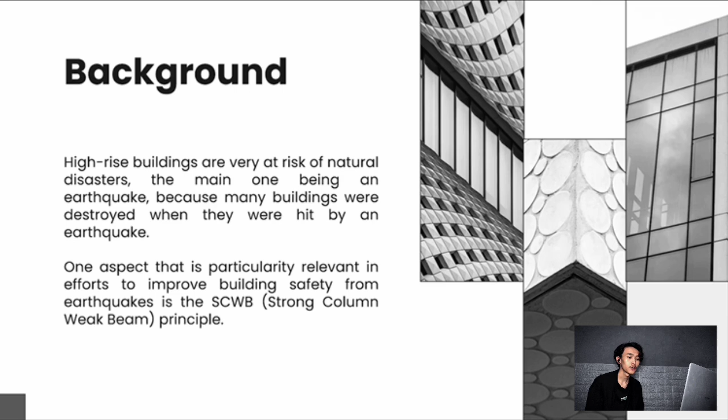Chapter 1, introduction. The first one is the background. High-rise buildings are very at risk of natural disasters, one being an earthquake, because many buildings were destroyed when they were hit by an earthquake. One aspect that is particularly relevant in efforts to improve building safety from earthquakes is the SCWB, or strong column weak beam principle.

And the next one is problem formulation. How to analyze SCWB, or strong column weak beam, on the safety and reliability of the structure of the Regional VII Branch Office Building, especially in dealing with earthquake loads and other loads. Next, the purpose of research: to analyze SCWB strong column weak beam on the security and reliability of the structure of the VII Regional Branch Office Building, especially in dealing with earthquake loads and other loads.

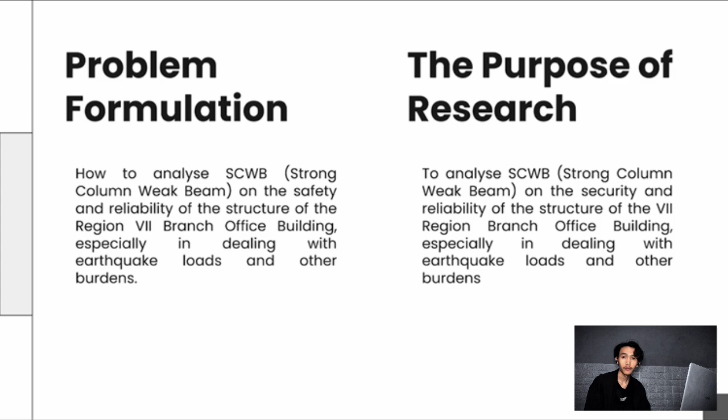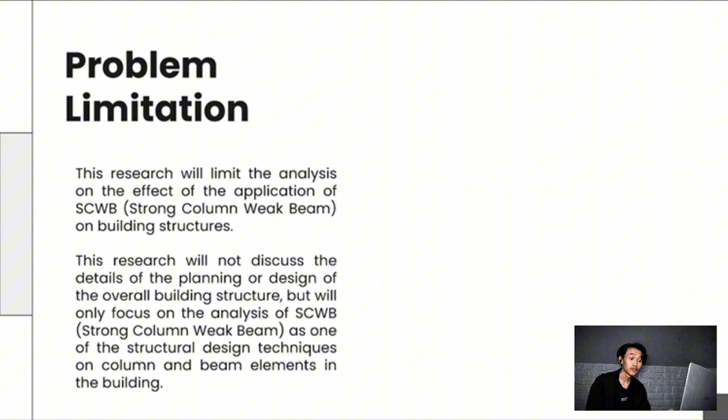Then, problem limitations. This research will limit the analysis to the effects of the application of SCWB on building structures. This research will not discuss the details of the planning or design of the overall building structure, but will only focus on the analysis of strong column weak beam as one of the structural design techniques on column and beam elements in the building.

And next, the benefits of research. Number 1, knowing whether or not the structure fulfills the conditions of strong column weak beam. Number 2, it can be used as a reference by students in the application of the strong column weak beam method. And the last one, the results of this research can be a guide to improve safety and structural performance of multi-story buildings in the face of earthquake loads and other loads.

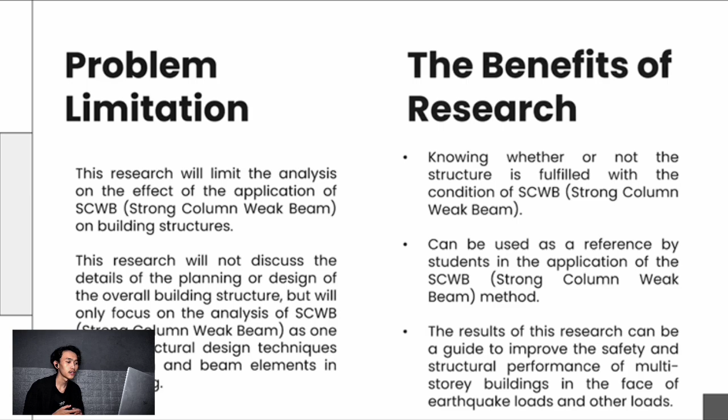Chapter 2 is literature review. Strong column weak beam. According to Murty et al. 2009, the concept currently accepted for seismic planning of reinforced concrete frame structures is the strong column weak beam approach. Strong column weak beam, or SCWB, is one of the structural design innovations by creating a flexible structural system that is able to deform during an earthquake. This concept is used to ensure that there is no plastic hinge in the column during the earthquake, and it is hoped that the column will not fail before the beam.

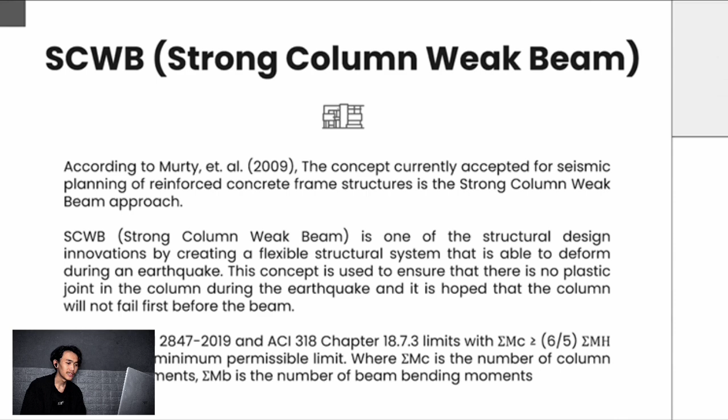Based on SNI 2847 2019 and ACI 318 chapter 18.7.3, the limit is ΣMc ≥ 1.2 ΣMb, which is the minimum permissible limit, where ΣMc is the sum of column bending moments and ΣMb is the sum of beam bending moments.

Moment bearing frame system. According to Faisal 2015, the moment resisting frame system, SRPM, is one of the main structural systems in resisting lateral force, be it lateral force due to earthquakes or wind. The moment bearing frame system is divided into 3. The first one is SRPMK, or Special Moment Resisting Frame System. The second, SRPMM, or Intermediate Moment Resisting Frame System. The last one, SRPMB, or Ordinary Moment Resisting Frame System.

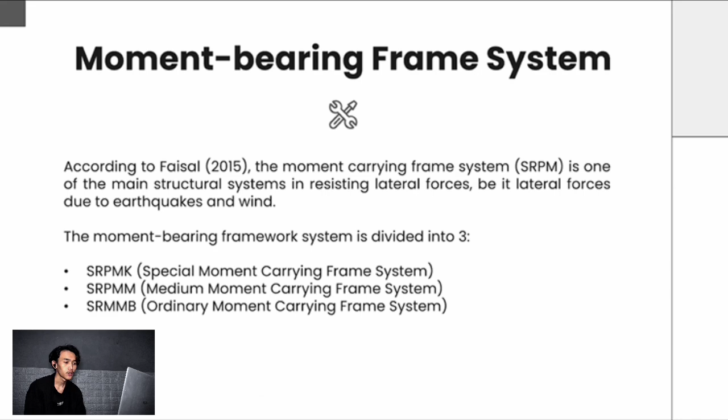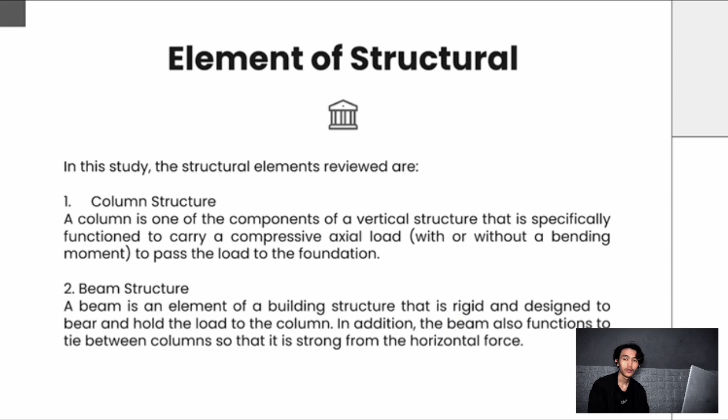Structural elements. In this study, the structural elements reviewed are: number 1, column structure. A column is one of the components of a vertical structure that specially functions to carry compressive axial load, with or without a bending moment, to pass the load to the foundation. Number 2, beam structure. A beam is an element of a building structure that is rigid and designed to bear and hold the load to the column. In addition, the beam also functions to tie between columns so that it is strong against horizontal forces.

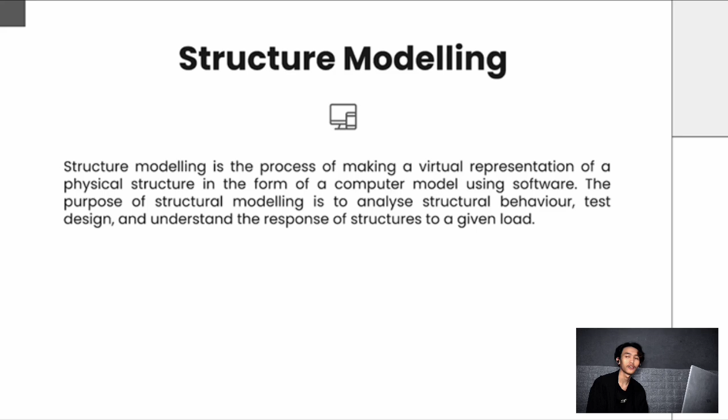Structure modeling. Structure modeling is the process of making a virtual representation of a physical structure in the form of a computer model using software. The purpose of structural modeling is to analyze structural behavior, test designs, and understand the response of a structure to a given load. Loading. A load is an external force acting on a structure. The loading used in this study is number 1, dead load, number 2, live load, number 3, wind load, and the last one, earthquake load.

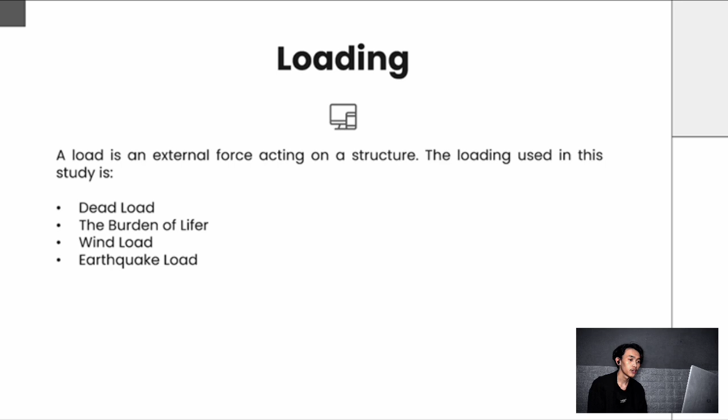Loading combinations. According to SNI 1726 2019, Article 4.2.2, the effect of one or more non-working loads must be reviewed. The following are the loading combinations. Number 1, 1.4D. Number 2, 1.2D plus 1.6L plus 0.5 Lr or R. Number 3, 1.2D plus 1.6 Lr or R plus L or 0.5W.

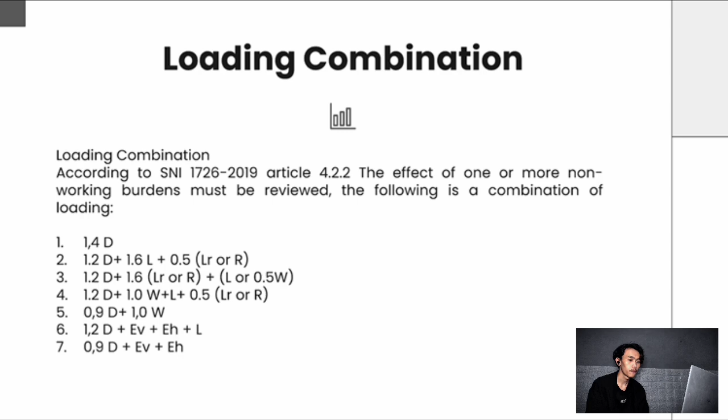Number 4, 1.2D plus 1.0W plus L plus 0.5 Lr or R. Number 5, 0.9D plus 1.0W. Number 6, 1.2D plus Ev plus Eh plus L. Number 7, 0.9D plus Ev plus Eh.

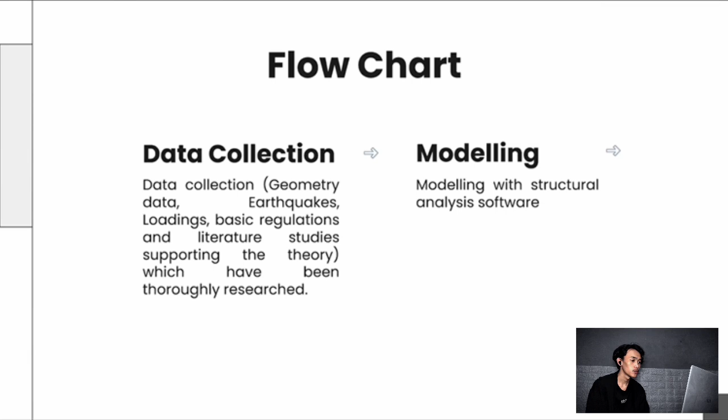Chapter 3, research methodology. You can see the flow chart in this thesis. Number 1, data collection: geometry data, earthquake, loadings, basic regulations, and literature studies supporting the theory, which have been thoroughly researched. Then, modeling with structural analysis software. Next, loading input, then structural analysis, evaluation of analysis results, and the last one, conclusion and suggestions.

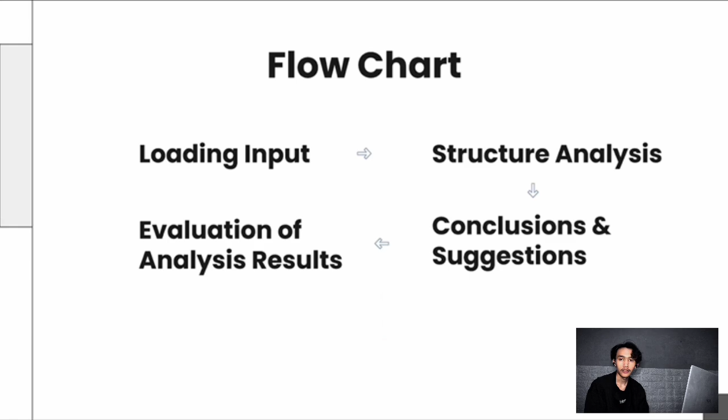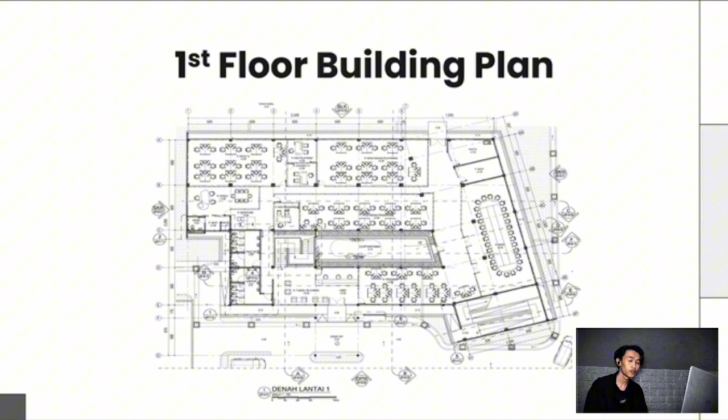Next, chapter 4, results and discussion. This thesis research location is at Jalan Pendidikan Cibiru Wetan, Cileunyi, Bandung District, West Java. You can see the design of the first floor building plan in this thesis, then the second floor building plan, and for building data, the building function is office building.

For the location in Bandung Regency, the structure portal type is reinforced concrete, the number of floors is 2, and the building height is 10.10 meters. The concrete compressive strength, f'c, is 25 MPa, fy for BJTS is 390 MPa, and for BJTP it is 240 MPa.

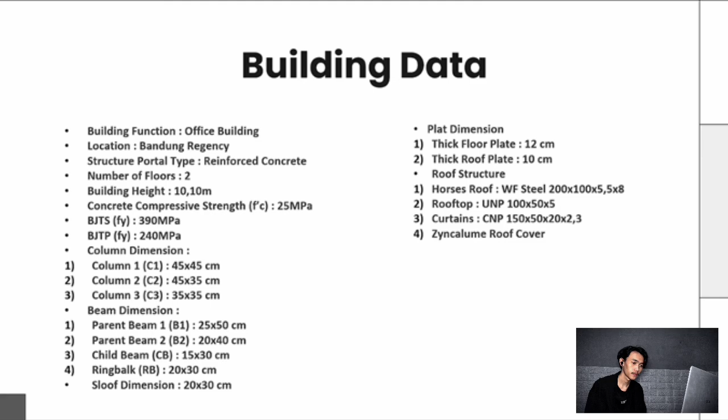For column dimensions, column 1 is 45 times 45 cm, column 2 is 45 times 35 cm, and column 3 is 35 times 35 cm. Then beam dimensions: main beam 1 is 25 times 50 cm, main beam 2 is 20 times 40 cm, child beams are 15 times 30 cm, ringbalk is 20 times 30 cm, and sloof dimension is 20 times 30 cm.

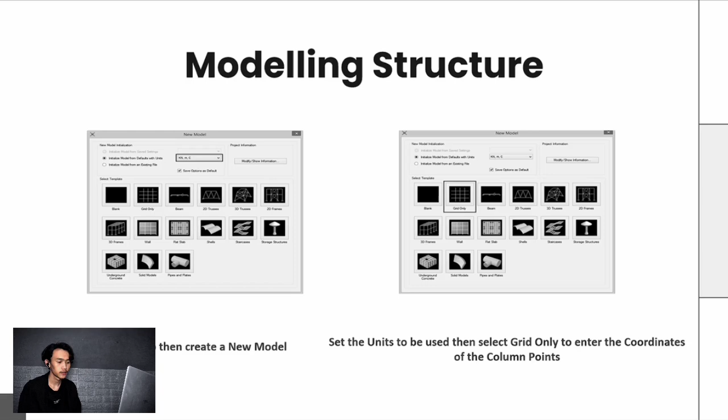For modeling the structure, you can open the app, then create a new model. Then set the units to be used, then select grid only to enter the coordinates of the column points. Next, enter the point coordinates of the column according to the figure. Then create the structure material by clicking define and materials, then add material, then enter the structure material used.

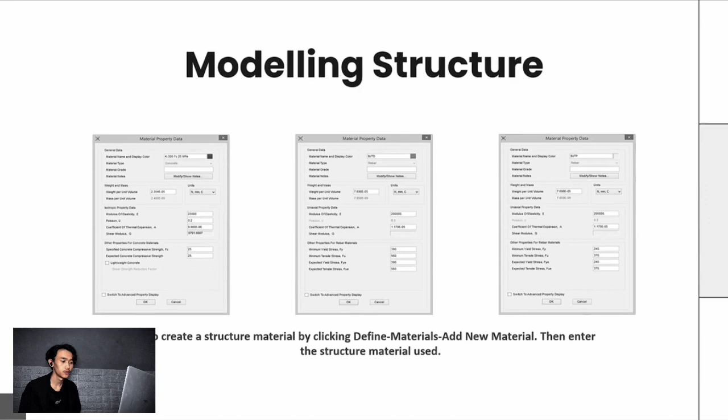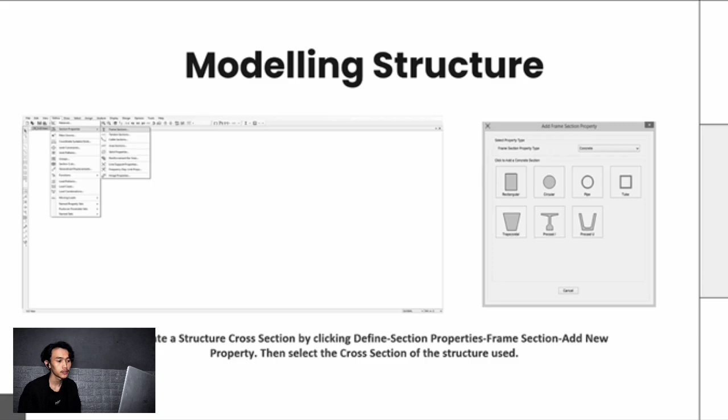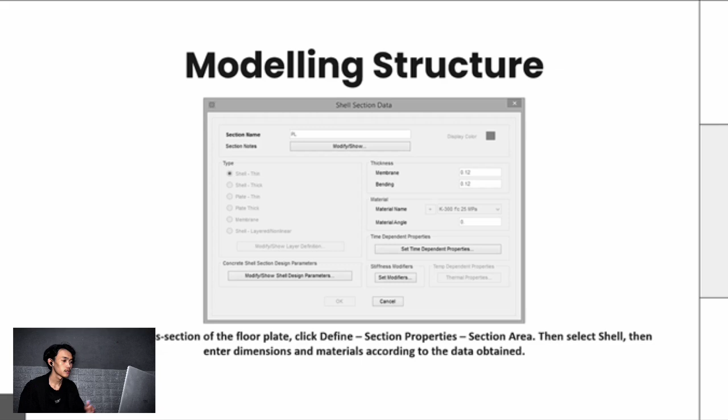To create the structure cross section, click define, then section properties, then frame sections, then add new property, then select the cross section of the structure used. Then adjust the dimension and reinforcement used on the columns, and likewise for beams. Just adjust the dimension to the drawing. To create the cross sections of the floor plate, click define, then section properties, and area sections. Then select shell, then enter dimension and material according to the data obtained.

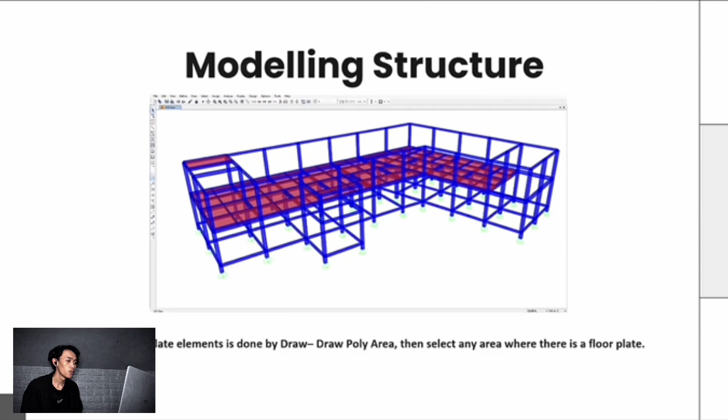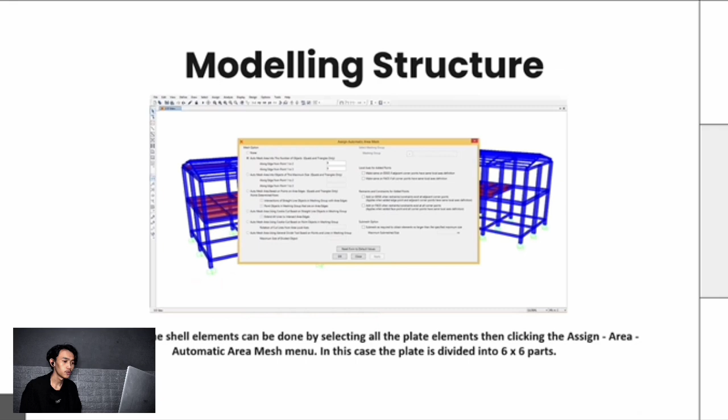The modeling of the column and beam elements is done by draw frame or cable element and then adjusting to the drawing of the column and beam placement. Modeling of the plate element is done by draw poly area, then select any area where there is a floor plate. Modeling of the roof element is done by draw frame or cable element, then make it according to the drawing. Division of the shell elements can be done by selecting all the plate elements, then click assign, then area, then automatic area mesh. In this case, the plate is divided into 6 × 6 parts.

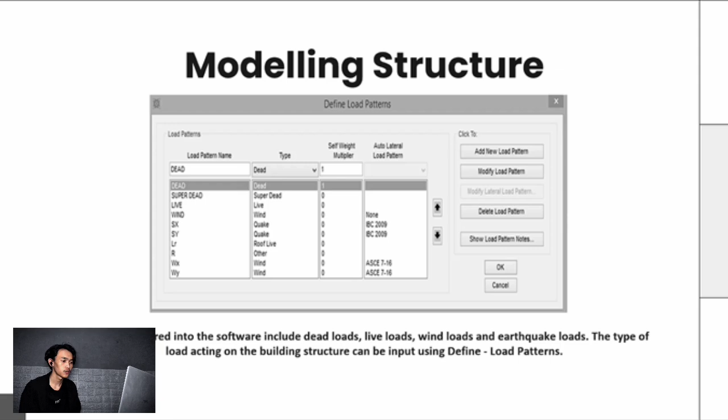The loads entered into the software include dead loads, live loads, wind loads, and earthquake loads. The types of loads acting on the building structure can be input using define load patterns. The dead load is distributed on the plate evenly by selecting the plate element, then assign, then area loads, then uniform (shell) distribution of the dead load acting on the plate. Based on the calculation, the dead load on the first floor plate totals 1.51 kilonewton per meter square, and for the roof plate it is 0.57 kilonewton per meter square.

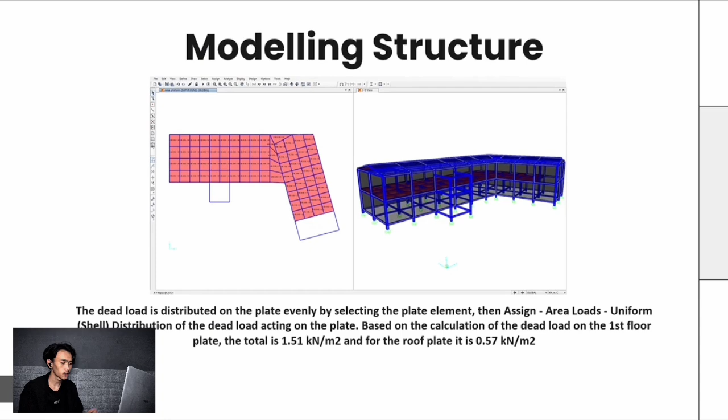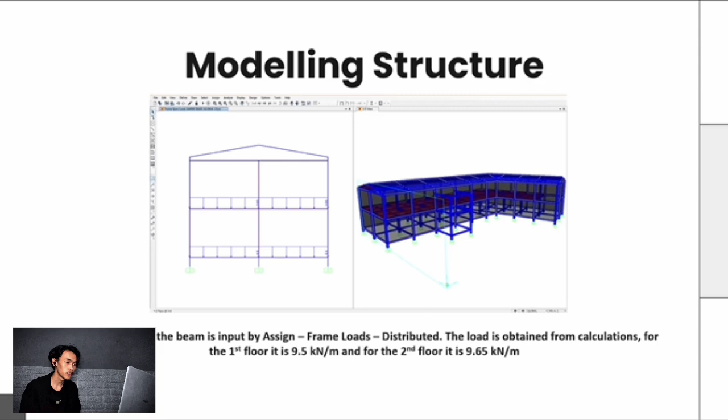The wall load on the beam is input by assign, then frame loads, then distributed. The load is obtained from calculations. For the first floor, it is 9.5 kilonewton per meter, and for the second floor, it is 9.65 kilonewton per meter. Distribution of live loads on the floor is done by selecting plate elements, then assign, area loads, and uniform (shell). The live load is obtained from SNI 1727:2020 for office live loads of 240 kg per meter square.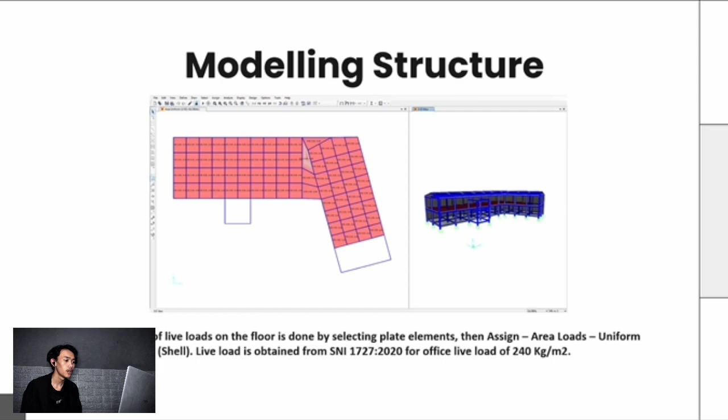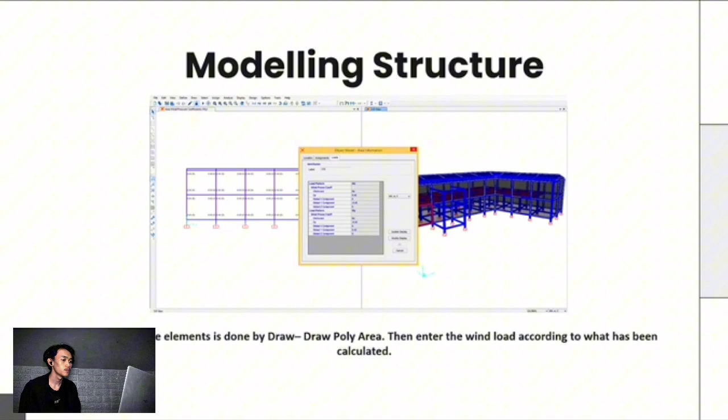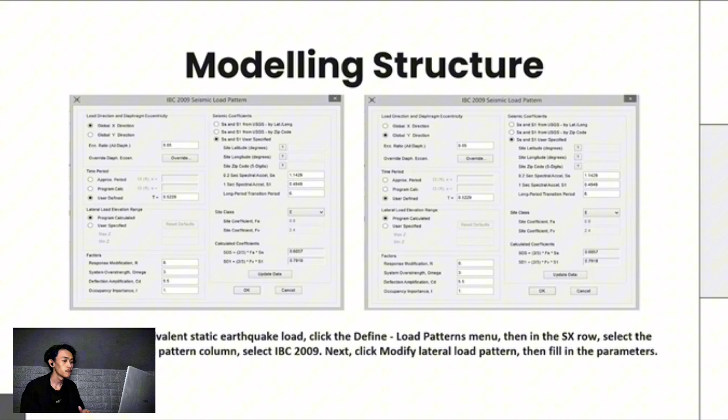Modeling is done by draw poly area, then enter the wind load according to what has been calculated. To enter the equivalent static earthquake load, click define, then the load pattern menu, then in the SX row, select IBC 2009 in the auto lateral load pattern column, next click modify lateral load pattern, then fill in the parameters. Input of the dynamic earthquake response spectrum can be done by define, then functions, then response spectrum, then IBC 2009,

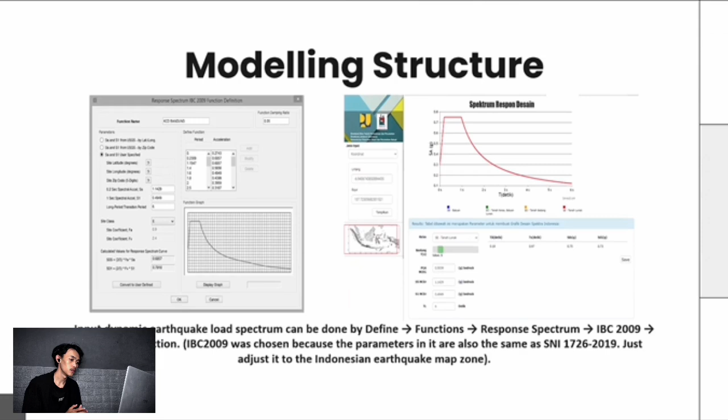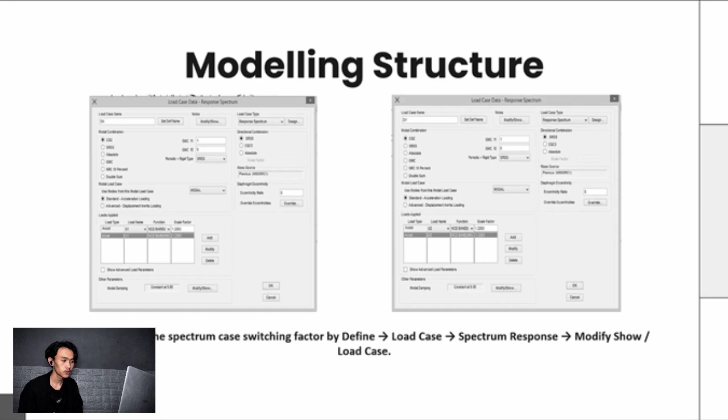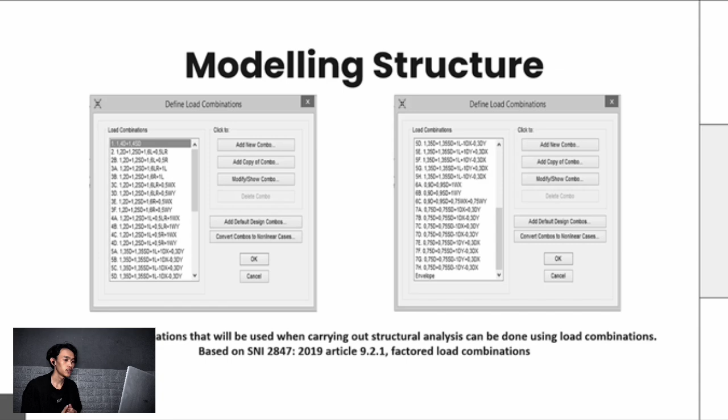and add new function. IBC 2009 was chosen because its parameters are the same as SNI 1726:2019, adjusted to the Indonesian earthquake map. Then input the spectrum scale factor by define, then load cases, then response spectrum, then modify/show load case. Define the mass source by define, then mass source, then modify/show mass source. The load combinations used in the structural analysis are based on SNI 2847:2019 article 9.2.1, factored load combinations.

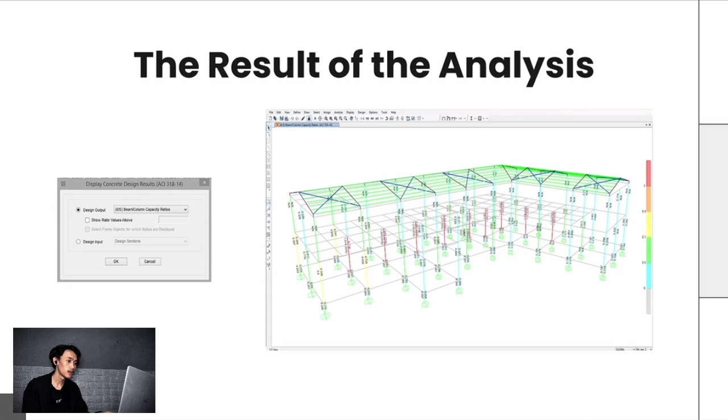And you can see the results of the analysis in this thesis. The last one is chapter 5, conclusions and suggestions. For conclusions, based on research carried out on the structure of the regional office branch office building regarding the structural strength analysis of the strong column weak beam requirements, it can be concluded that there are 9 column points that do not meet the strong column weak beam requirements, namely

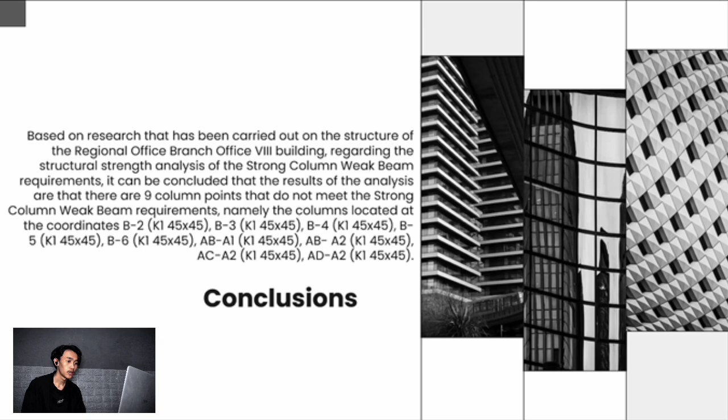the columns located at coordinates B2 K1 45x45, B3 K1 45x45, B4 K1 45x45, B5 K1 45x45, B6 K1 45x45, AB-A1 K1 45x45, AB-A2 K1 45x45, AC-A2 K1 45x45, and AD-A2 K1 45x45.

Suggestions that can be taken from the final thesis with the title SCWB strong column-weak beam analysis on the structural design of the Region 8 Bandung Branch Office Building: for other researchers interested in similar problems, the results of this research should be developed with a wider scope, considering its limitations, and that in this modern era many structural designs are combined with other structural plans, and structural planning for earthquake areas, especially in Indonesia, should follow the latest SNI requirements based on classification in order to produce plans with the latest regulatory standards.